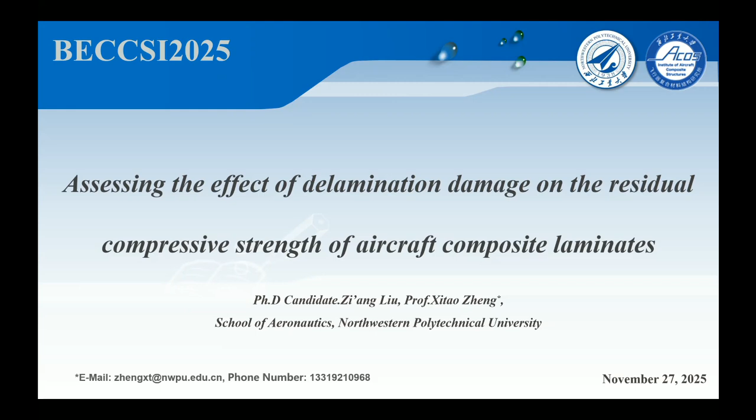I'm honored to present our work on assessing the effect of delamination damage on the residual compressive strength of aircraft composite laminates. My topic is organized as follows, focused on three areas. Let's start with the background and motivation.

Establishing appropriate design allowables is critically important for ensuring structural safety and reliability. For composite structures, determining the design allowables requires consideration of structural integrity, which encompasses strength, stiffness, damage tolerance, and durability. From the perspective of damage tolerance, our research aims to increase the design allowables for composite structures. Improving damage tolerance primarily involves assessing the residual strength of the damaged structure.

Research indicates that composite structures can experience a significant reduction in residual compressive strength after impact loading. The composites have relatively weak interlaminar properties, making them susceptible to delamination damage on impact, which severely compromises their compressive performance. Furthermore, studies have shown that delamination defects account for a substantial portion during the manufacturing process of composite structures. Therefore, it's critical to investigate the influence of delamination damage on the residual compressive strength.

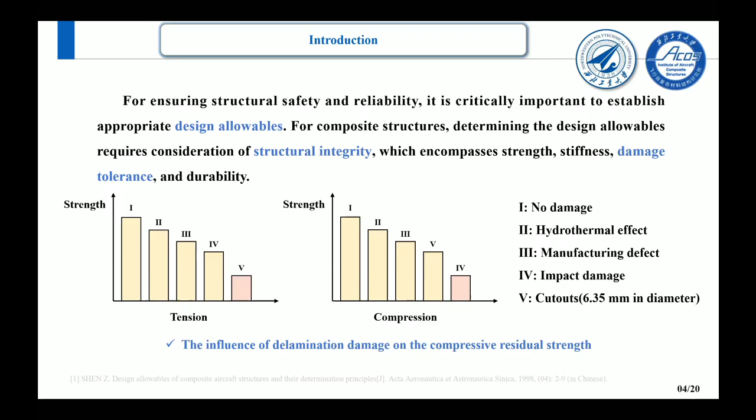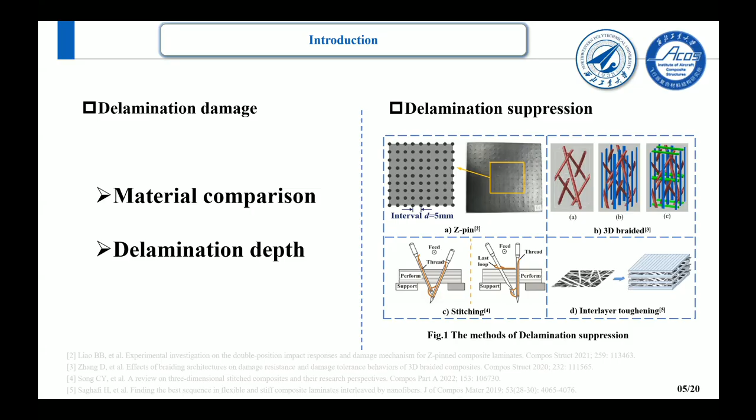The literature survey has identified that three key problems have not yet been adequately addressed. Firstly, how to select materials for aviation structures susceptible to delamination. Secondly, a more comprehensive analysis of the effect of delamination depth on residual compressive strength needs to be done. Furthermore, currently available methods such as z-pinning, three-dimensional braiding, stitching, and interlayer toughening have been found to demonstrate fairly limited improvements in suppressing delamination damage under low-velocity impact energy. Moreover, these techniques can adversely affect the in-plane properties of the original structure.

To address these challenges, we propose a research plan centered around three key aspects. Firstly, we will compare the effect of delamination damage on the residual compressive strength of different composite laminates. Subsequently, the influence of delamination depth will be investigated. Finally, in an effort to mitigate the detrimental effects of delamination on the mechanical performance of the laminates, we will explore the application of a discrete toughening strategy to suppress its growth.

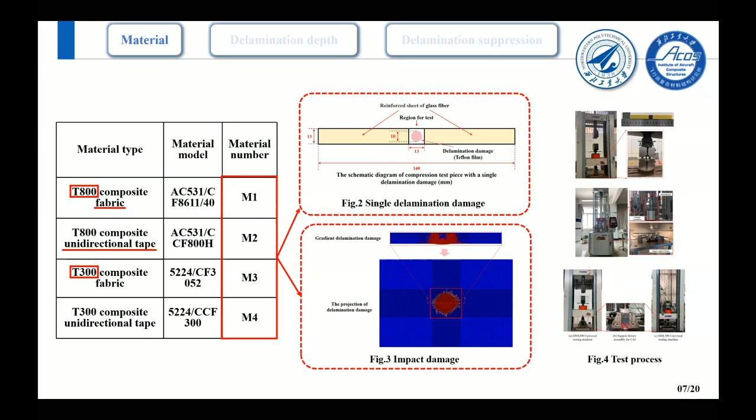For the first part of our study, we selected four distinct materials combining two strength grades and two fiber orientations, designated sequentially as M1 through M4. Delamination damage was introduced by two methods. The first involved inserting a Teflon film at the midplane during the laminate manufacturing process to create a single delamination to simulate effects arising from production. The second method subjected the cured laminates to low velocity impact, replicating in-service threats such as hail, runway debris, or wrench drops. It's worth noting that this phase of the research was conducted experimentally.

Analysis of the test data on residual compressive strength for laminates with single delamination and impact damage led to two primary conclusions. Firstly, low velocity impact damage degrades the compressive performance of laminates more severely than single delamination does, especially for low strength unidirectional composites. Secondly, in impact-prone or delamination-sensitive areas of aircraft structures, the use of high-strength fabric prepregs is preferable to unidirectional prepregs for enhanced structural integrity.

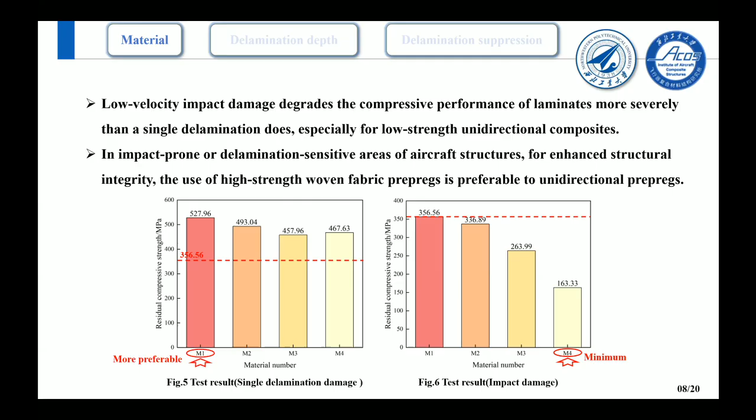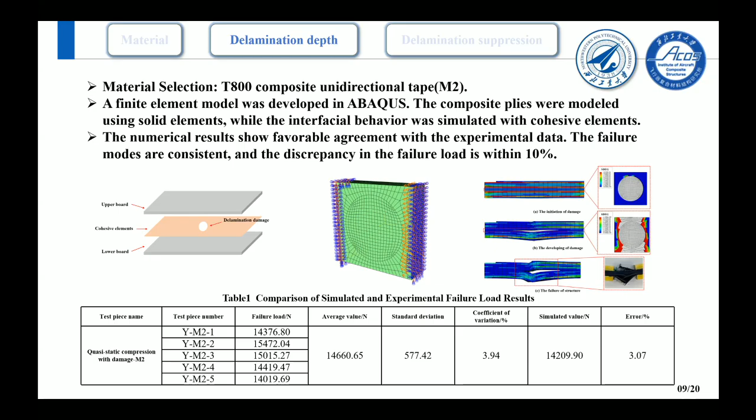The second part of our research primarily utilized finite element simulation to investigate the influence of delamination depth on the residual compressive strength of composite laminates. A single composite laminate material was selected, and a finite element model of a laminate containing a single delamination was developed in Abaqus. The composite plies were modeled using solid elements, while the interfacial behavior was simulated with cohesive elements. A comparison between the simulation results and the experimental data showed consistent failure modes. Furthermore, the error in predicting the failure load was within 10%.

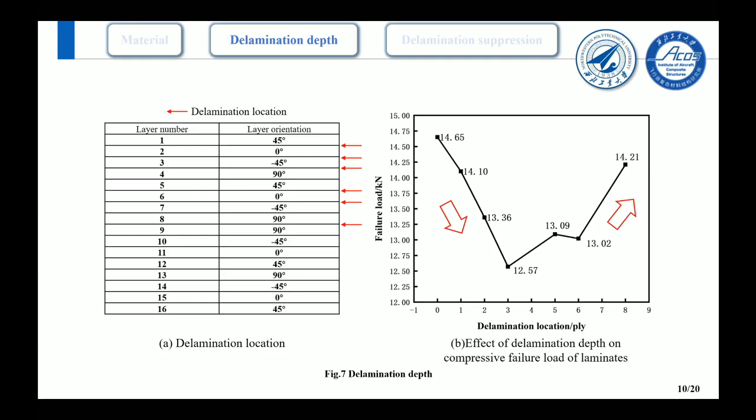Based on the established finite element model, the position of the delamination was varied in the depth direction. The computational results presented in Figure 7b indicate that the compressive failure load of the composite laminate exhibits a trend of initial decrease followed by an increase as the delamination depth progresses. Finite element simulation provides the explanation for this trend.

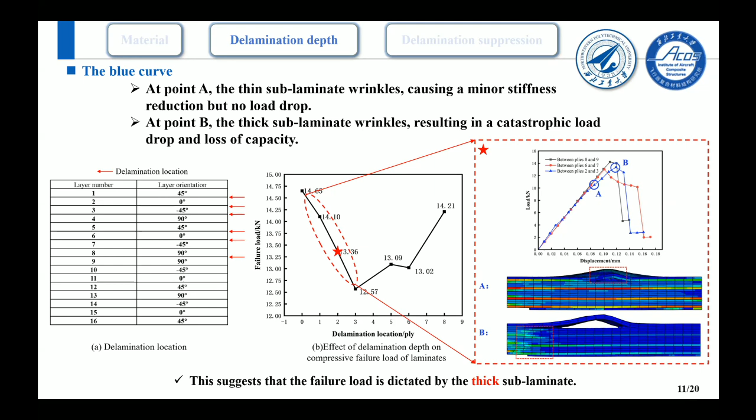Now please observe the red curve, which represents the deeper delamination. At point A, the thin sublaminate wrinkles first, causing premature global failure. The failure load is now governed by this thin sublaminate. As depth increases, the governing thin sublaminate becomes thicker, leading to an increase in failure load.

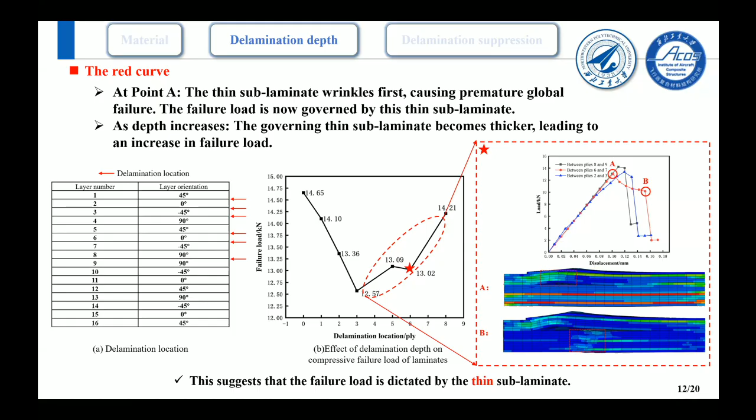Finally, attention is turned to the black curve in the figure, which represents the case where the delamination is positioned at the midline of the laminate. Due to the symmetric layout, the upper and lower sublaminates are nearly identical. They consequently underwent simultaneous wrinkling, leading to an instantaneous load drop. Notably, the failure load of this midplane delamination laminate shows almost no reduction compared to the undamaged laminates.

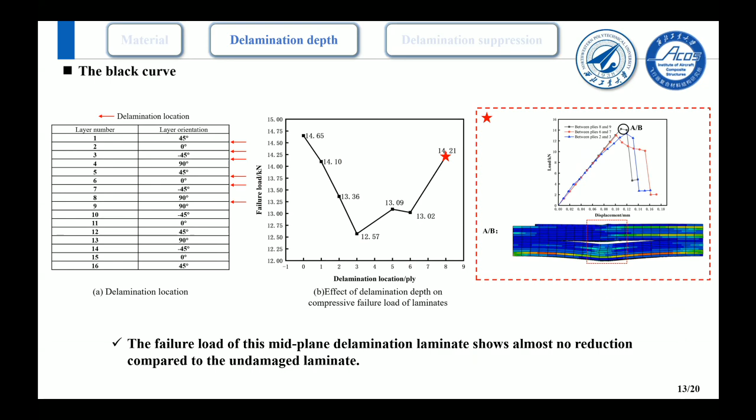In summary, the key findings from the above analysis are as follows. To begin with, the compressive failure load of the composite laminates exhibits a non-monotonic trend with increasing delamination depth, characterized by an initial decrease followed by a subsequent increase. In addition, depending on the depth of the delamination, the bearing capacity of composite laminates is governed by different sublaminate configurations.

Finally, the delamination splits the composite laminate into upper and lower sublaminates. The effect of the delamination on the mechanical performance is minor under the critical condition where the load-bearing capacities of these two sublaminates are balanced, leading to their simultaneous failure.

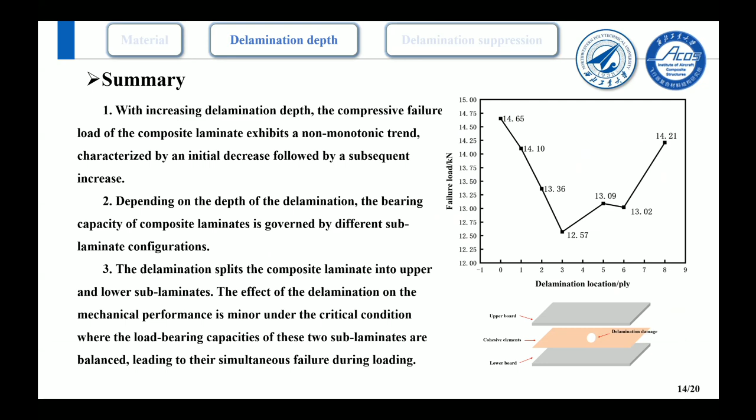Last but not least, we implemented a specific strategy to suppress delamination. Delamination damage incurred during actual manufacturing is not necessarily circular. Elliptical delamination is more prevalent. Our investigation revealed that an elliptical delamination is more critical when its major axis is oriented perpendicular to the loading direction. Introducing toughening materials at the interfaces of composite laminates can enhance their interlaminar fracture toughness.

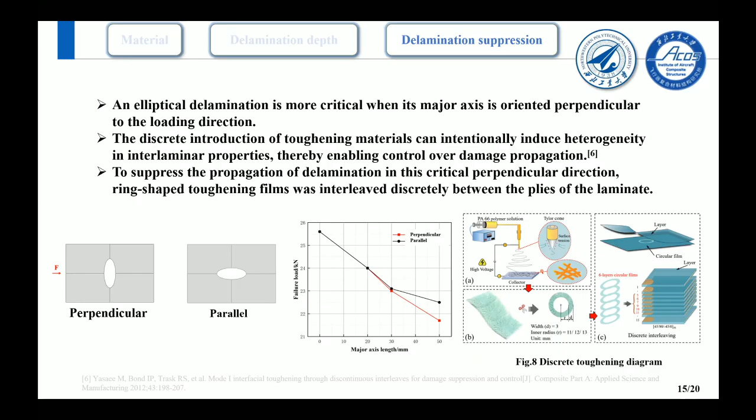To suppress the propagation of delamination in this critical perpendicular direction, ring-shaped toughening films were interleaved discretely between the plies of the laminate. As shown in the figure, the results from the low velocity impact and subsequent compression after impact tests are presented. It can be concluded that the discrete toughening strategy significantly enhances the residual compressive strength of the composite laminate by effectively suppressing the delamination growth perpendicular to the loading direction.

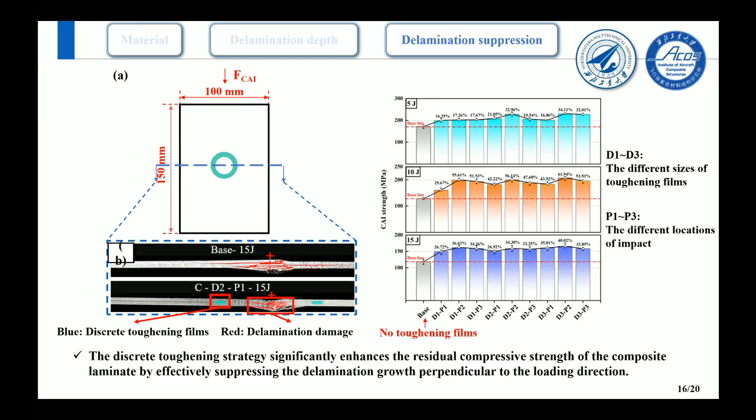Based on the investigation detailed above, the primary conclusions are as follows. To start with, for locations in aeronautical structures that are susceptible to impact or prone to delamination, selecting high strength carbon fiber fabric prepregs is the more favorable choice compared to unidirectional tape from a structural integrity standpoint. Additionally, the bearing capacity of composite laminates is governed by different sublaminate configurations depending on the depth of the delamination.

Last but not least, the discrete toughening method significantly enhances the compression after impact strength of laminates by restricting the propagation of delamination damage in the direction perpendicular to the loading axis.

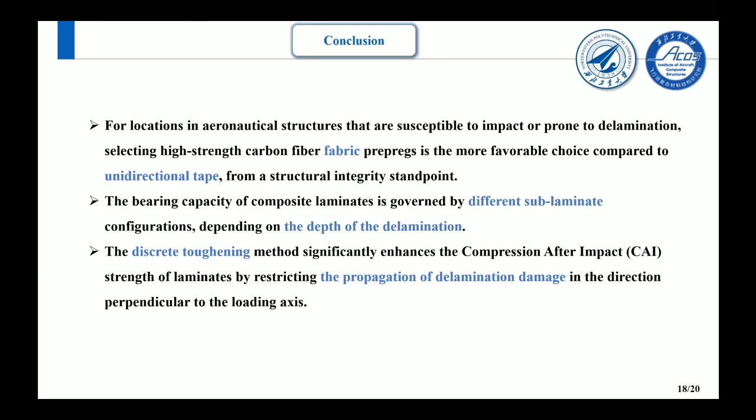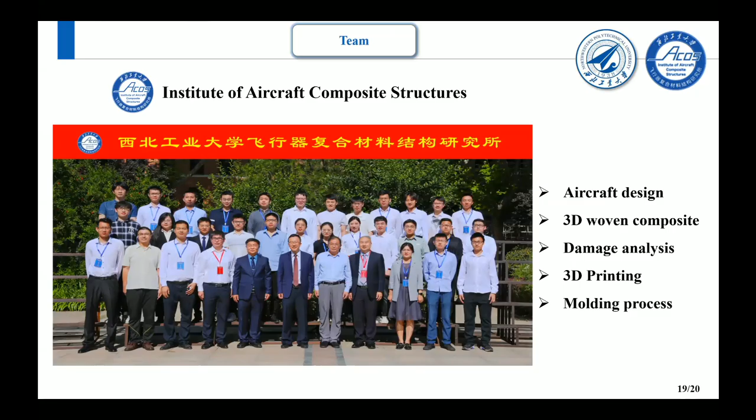Next, I would like to introduce my research team. The Institute of Aircraft Composite Structures is based in the School of Aeronautics at Northwestern Polytechnical University, located in Xi'an, Shaanxi Province. We focus on the design, manufacturing, and analysis of composite material structures, and aim to solve the key technologies in the design and manufacturing of aircraft composite structures.